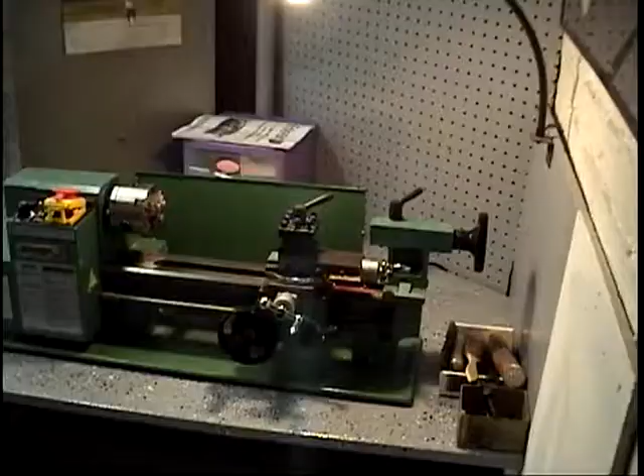When I finally got around to getting the lathe out of the box and setting it up, I knew I couldn't work in that little area we had. So I organized this whole area. This took a couple of days, but now that it's done, Karen has helped me organize all my drills, buffing pads, and all these little peripheral things. We painted the tabletops too, and I've shown some of that on previous videos.

But the bottom line is, now I can get some serious work done. We're coming up on that part of the year, in fact if you look out at the weather today, it looks like it's going to snow.

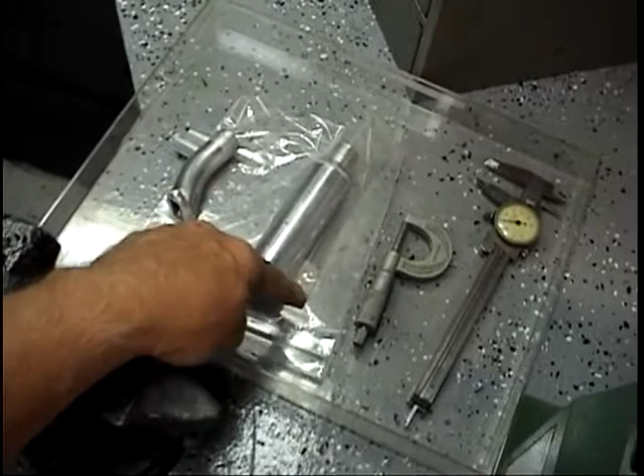I think one of the things we were able to make up, little test parts, these are going to be more. We're going to try to get them professionally welded now. We learned a lot about exhaust systems, and we know on Sergi Belco's, if I just put a bigger exhaust stack on that, it'll be real nice. We learned a lot, and every time we learn something, I try to pass it on, because that's part of what I enjoy about life.

I love being out at the field all covered with grease and oil, sweating and uncomfortable, but I love to, on that ride home, think I learned something.

Every time I needed a screw, a bolt, or a nut, it just made me crazy. I needed a crimp, couldn't find them, now we have them. I needed a wheel collar, couldn't find them, now we have a drawer. So what I'm suggesting is, maybe as we start the building season, this is something you want to consider. This organizer was about $15, and some of these other organizers I got years ago, I got all these new pliers too. What I want to do is start this year's plans off with the shop organized.

Now, over the years, what I've been very prone to do is this. I don't know if it's in the gene pool, but I know my mom and my sister are all saveaholics. We really saved everything. Part of that is because we were very poor, so we never threw away an old tire, an old wheel, an old bicycle rim. We saved everything, because you never knew if somebody was going to lose their job or whatever. So we saved all this junk.

But what happens, and it's this time of year right now, I go through the house, through the garage. We have a garage weekend coming up in the next couple of weeks. Karen and I save stuff all year, and then we have what we call our fall throwout day, which usually results in about 15 bags of garbage. Then, though these things don't necessarily happen at the same time, I like to organize.

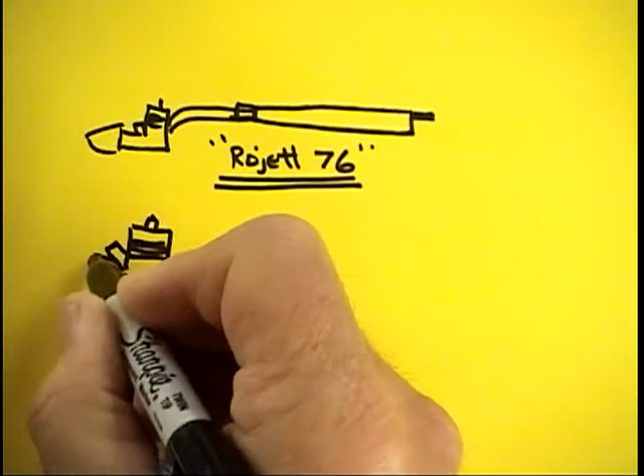The 90 will be even better, but there's going to be a difference. It's a subtle difference, and you don't think about it. A lot of people don't even understand how it works, and maybe I'm one of them, I don't know. But this is going to have some kind of a muffler.

Now what I'm going to constantly be working toward is a thing I call powertrain weight. We're basically going to be replacing a tuned pipe, which is about 2 ounces, a coupler and header, which are about another 2 ounces—so that's 4 ounces—a 12-ounce motor, and a 1-ounce spinner.

Now these are the component parts, and when I take the Spitfire apart—we're going to be doing a lot more testing even in bad weather—I want to know what this whole powertrain component part thing, the total all-up weight, is going to be.

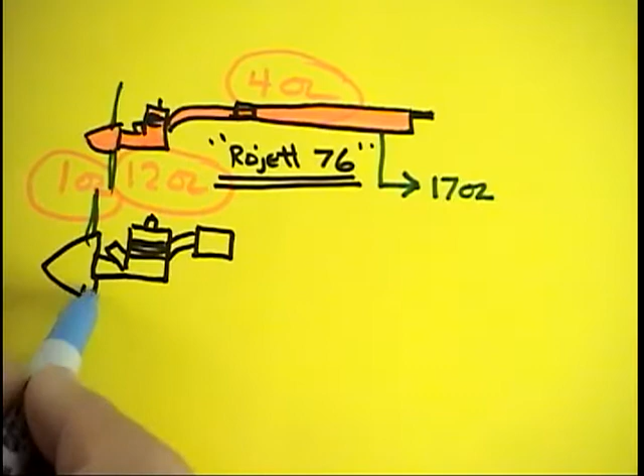Well, just rough numbers, our whole powertrain last year was about 17 ounces. Now it doesn't really include the prop, because we're using pretty much similar props on both of these. The Doran props are the lightest of the props.

We haven't done any 3-blade testing with this yet, because Doran hasn't given us any of the bigger diameter props, but we certainly will be the first ones, hopefully, to get them. Here's my point now—I'm starting with what started out to be a 21-ounce engine.

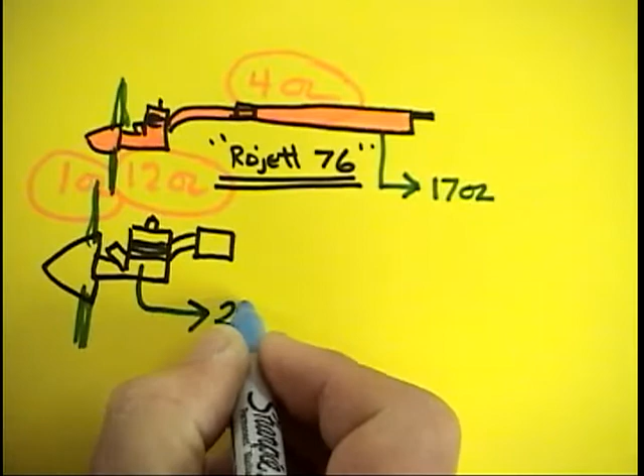A little under 21 ounces. Did not include the muffler—that's another ounce for the muffler, this little muffler that came with it. And the spinner now is about a half ounce.

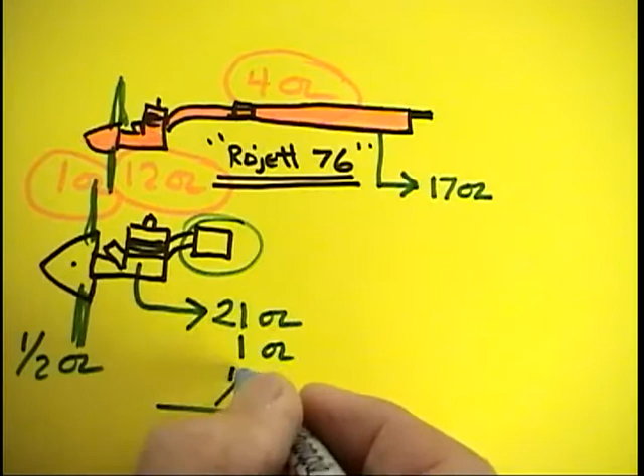Well, here's what I'm alluding to here: we've got a variance of just rough numbers now. I'll give away the half ounce, just to make this simple. We've got a 5-ounce difference in total all-up weight.

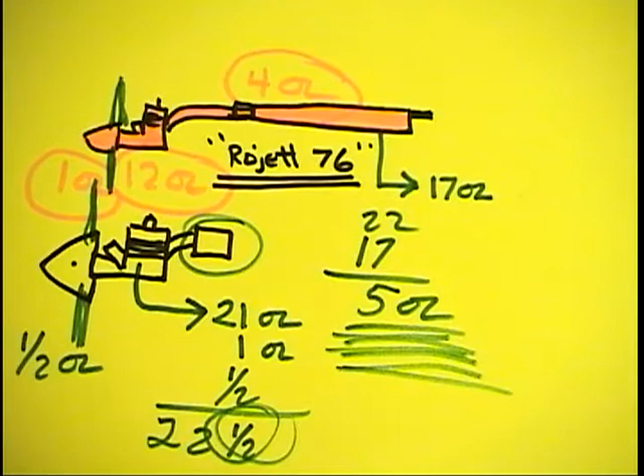Now, we've pecked away at this. This isn't 5 ounces anymore. We started out with a 5-ounce handicap, which I managed to reduce by making a lighter drive washer, and that pecked it down to about 4.5. I'll be rough about these things. Getting some material off the back of the motor, and the header was another half ounce altogether, so I'm down to 4 ounces.

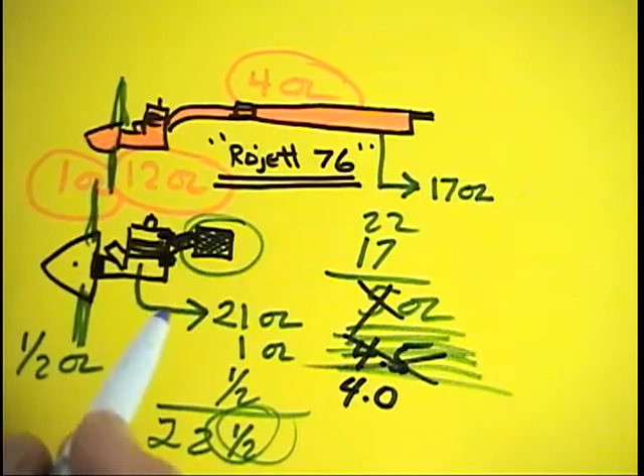Now, part of what I want to try to do, and start working on today, Bob Zambelli may be able to get Saturday off and work with me on this. We want to make up some real lightweight exhaust parts, because one of the gains we can make is that we don't have to carry around a 4-ounce exhaust system.

Between the header, the coupler, and the pipe, that's a 4-ounce Christmas tree ornament. I'm hoping we can get this down to 1.5. I have it down to 2 already, and I think there's another half ounce left to get out of there.

We're also going to get this case from Rich Oliver, and he's going to allow me to butcher up the case and see how much aluminum I can get off it. But keep in mind, as we start this, we're starting with a 4-ounce handicap.

Now Rich Oliver already sent me, I have it in the truck ready for our next test day, Hemi heads. I know in the past that on the squish band head, when you took out material there was a little bit of a weight gain. I know on some of the heads I did on Old Tigers I took down some of the diameter. I don't know how much we'll be able to take off this one. And I've taken off some of the finning off the head.

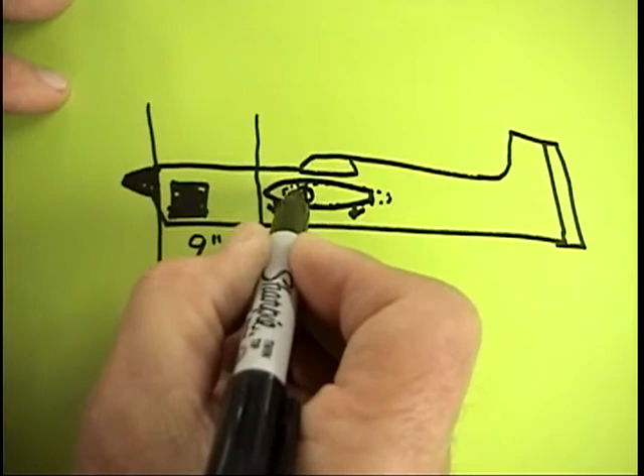We know that losing 1 inch off the nose, and you can figure the calculation, there's a scientific formula, if you move that weight further back to the CG, this is all good and well. But I know an 8 inch will be too short, because with the Typhoon, what happened is that motor there was no ability to get weight off of it.

That motor just went in at 21 ounces or whatever, 19.9 or whatever. So I'm not going to run that risk, because now we do have much lighter spinners. The spinners and the carbon fuel tank, these are the parts that make this happen - a light spinner, a light fuel tank, getting some weight off the nose.

Now the wing is going to be further forward. I don't want to change the view of the plane, I just want to have the wing further forward, which automatically is going to increase the tail moment 1 inch. So we'll have aerodynamic forces where the tail moment on this now will be 1 inch longer - it'll be 18 inches. I've built pattern masters - in fact, Jose's plane, this is a 10-inch nose and an 18 tail.

And I got this wrong, by the way - it should be measured hinge line to hinge line. But just to make it clear, look what happens when you do that.

Now when I draw the center of gravity line in, my 9-inch nose - let's pretend this is a seesaw, and I've taken the guy who's the heaviest on the seesaw and moved him closer to the fulcrum, taken the lighter of the two guys and moved him an inch away. So the aggregate gain is 2 ounces here.

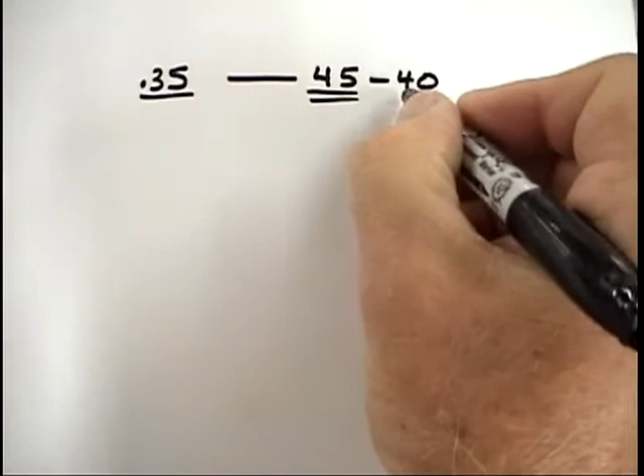Now, to relate that correctly, think about this for a minute - this is the part that you have to think about before this all makes sense. We all know an old Fox 35, just to use a good example. Fox 35 would be real happy pulling around a 45-ounce plane, but it was a lot happier if it was 40 ounces. It was really happy - you build a Nobler at 40 ounces with a Fox 35, probably a good combination.

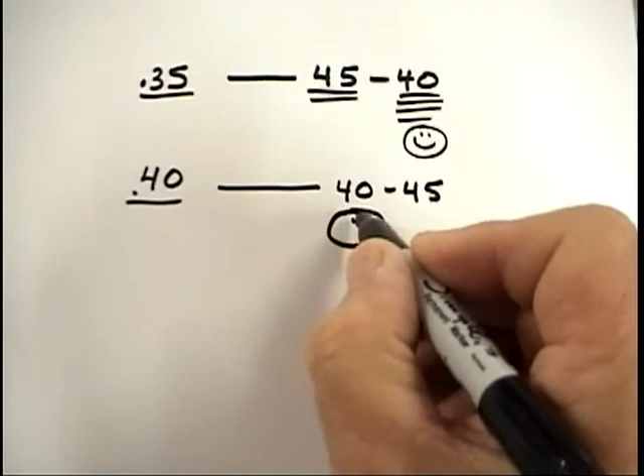We know, for instance, typical 40 planes - you can pick the one you like, unless you're building ultra light - these are going to be in the 40 to 45 ounce range, and they're better, of course, at 40, but even at 45 they're okay. Now, what happens if you build a 60 ship? Look at what really happens - almost every 60 ship that we've ever seen comes in between 60 and 65, except for maybe some very heavy ones or very large ones like a Pattern Master.

Okay, but here's what's happening with the 76 - the reason we had a nice gain was it wasn't any heavier. The plane didn't get bigger and heavier, but the motor got bigger.

Now, the analogy I use: if you have a Corvette - we're going to look to bring this plane in at 65 ounces with a 90 - if you have a Corvette and it's got the 283 engine and you take it out and put in a 427, well, there aren't many people that don't realize you can detune the engine, you can drive around in 4th gear, you can run a much lower state of tune that always equals reliability. It'll get friendlier to drive - it's always friendlier to drive a big engine.

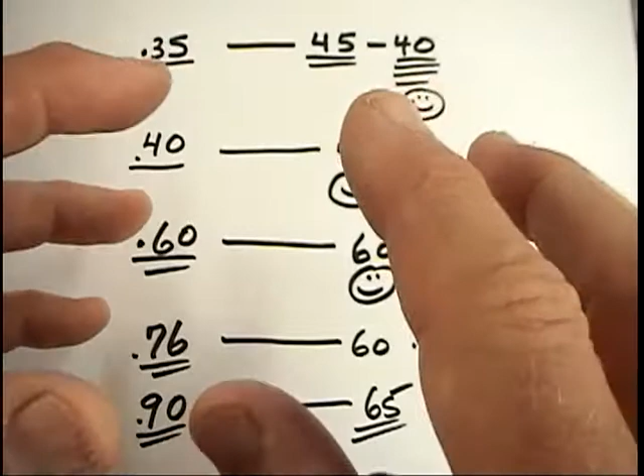So what we're looking to do is, again, the same plane that used to be pulled by a Tiger 60, in fact it's exactly what we're flying right now, is a plane where the cubic inches exceeded the weight by almost 50%. Now in this case, on a Fox 35, it was the opposite. The cubic inches and the weight were in an unfavorable 1-to-1. Somewhere around a 40 ship, it gets to be 1-to-1. But in these bigger ships, you get a bigger displacement to weight ratio, and that's where I think the gain will come from.

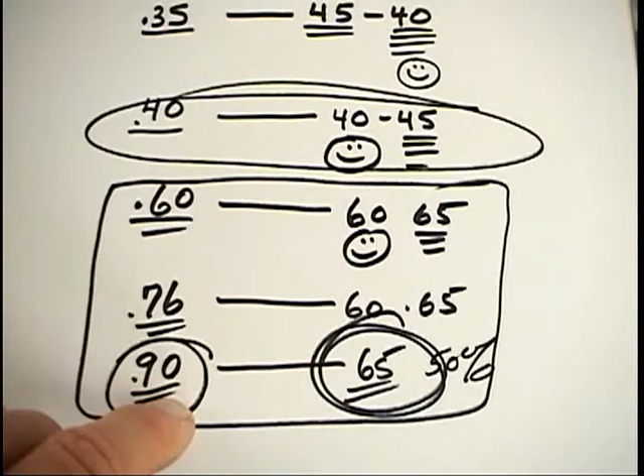It'll look like a normal plane, it won't get bigger, it won't get a lot heavier, and it won't get a lot different looking in the pattern, but it'll be detuned to the point, once we come up with more exhaust systems, more head choices, and more people start working with this engine, we can still have a lot of the good characteristics, like putting a 427 engine in a Corvette. It'll be a Corvette that's a lot easier to drive.

Now, one other side benefit. In the case of Rich's Stuka, there's only one detracting feature that if I was a semi-scale buff, looking to make it as scale as possible - there's one thing that really detracts from Rich's plane. It's the sound. Running the thing at a high RPM, the sound is nowhere near as scale as if you were running at 8400.

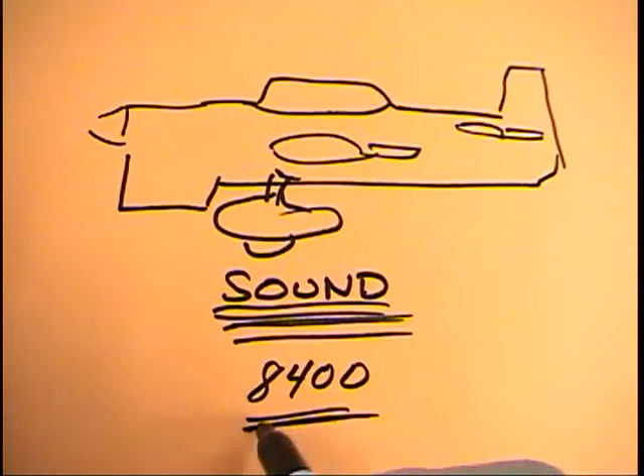So if it's going to be a semi-scale plane that Rich is building, there'll be an advantage in a lot of ways. He won't have to allow for the pipe under the fuselage. He can make this fuselage a lot more scale. The exhaust will come out where I think it's an optimum place, and Sergey Belko told me this - when it exhausts out here, it leaves a smoke trail. When it exhausts right under the high point of the wing, or just in front of it, the wing dissipates the smoke. This plane that we're flying has almost no oil on it at the end of the day.

It's a one paper towel wipe off. And the other thing is the smoke trail - go look at the videos, there's almost no smoke trail at all. It dissipates that smoke beautifully.

So these are two little things, and if you go back and think about exhaust systems, that's the next thing we're going to be developing - two things hopefully in the next week or so. We're going to be doing the Hemi heads and coming up with some exhaust system options.

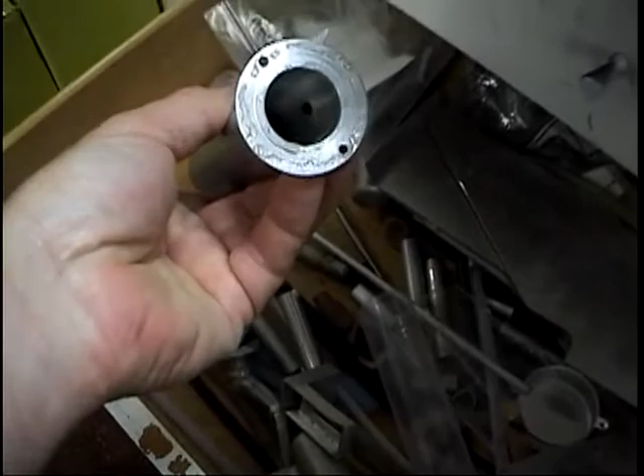Every once in a while I go into this drawer because I had a lot of experimental things I made years ago - side to rear exhaust, and these were complex machine shop jobs. Craig Gunder made a lot of these. We have a lot. This was one of the ones we actually used at the Nats, this design, except obviously it's heavy, it's thick wall tubing. In fact, we could make a muffler out of this, and just, now that we have a lathe, thin wall it down. Some of these are just complex.

I don't even remember who was making them, but a bunch of different little wall tubings. Now Warren Walker is due here within a week, and he's going to be bringing us some tubing and some stuff, some billets. I had done this one and even tried to super lighten it up, another side to rear. But here's the point - in the course of making these, I've made a few exhaust systems, and I might have made more than most people, maybe more than anybody. I don't know, that's up to you to decide. But we do know certain do's and don'ts about exhaust systems.

Now, no matter what the rules may be, these are always the rules, and there's not much you can do about it. A side exhaust engine will always have an advantage of getting rid of the exhaust heat no matter where you put it into the airstream, whether you make a tube muffler or a tongue. A side exhaust is really your best friend when you're looking to cool an engine. It's a tremendous difference than having a rear exhaust, especially when you don't have good airflow over the engine.

But what we learned, and we're going to just reverse this for a little bit - when we make a rear exhaust, number one, we have to allow, and you've seen I put those pieces of wood on the plane to funnel some more air. This is the hottest part of the engine. This is the rear exhaust.

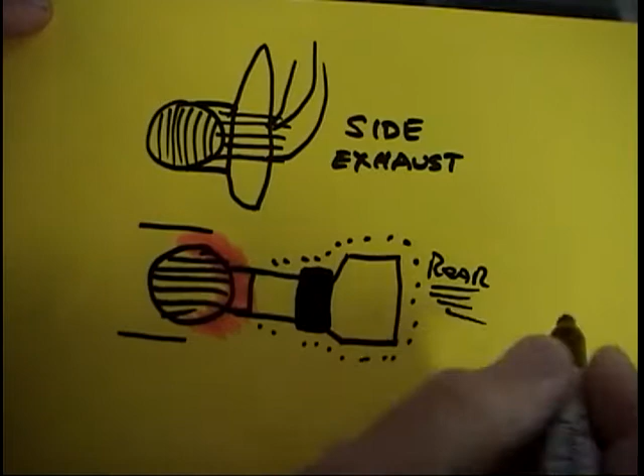Now, when we started making tuned pipes back in the late 80s, the pipes of the day, which were pretty crude to say the least, were way over 3 ounces. Many were 3.5, some were even 4 — some of the original ones I remember weighing were 4 ounces. Well, we have them down now to where they're a whole lot lighter. A lot of them are under 40 grams, a lot of them are in the 1.5 ounce range.

The modern ones — but I hope I'm going to be able to use that same technology to make an all-aluminum exhaust. Now, this might even be obsolete in a week for a simple reason.

Normally the resin we use to make the tuned pipes is rated for a constant temperature of 450 degrees once it's post-cured. That means, in theory, you should be able to leave it running all day long at 450 degrees without a problem. The issue is, right up here, if you've ever looked at any of your pipes, this front part really starts to get brown a lot quicker than in the back, because the temperature up here is very hot. It gets cooler and cooler as you get to the back of the pipe. A lot of people don't know that.

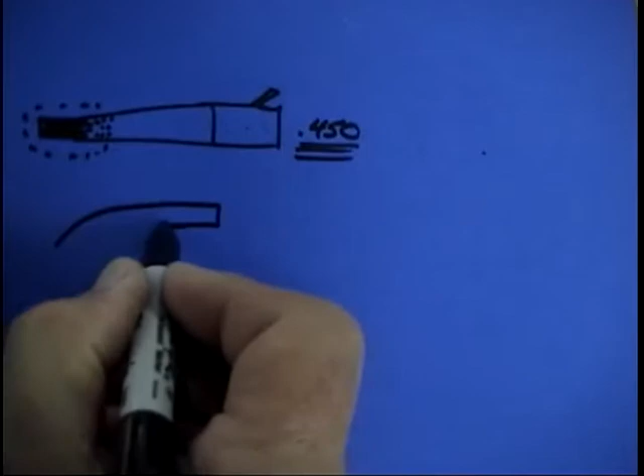Well, if you were to take a header — and I've seen people do this — they don't want to shorten a pipe, so they cut this much off the header, put the rubber coupler up here, and immediately they have problems with life expectancy.

So what we want to do — the objective of all this — number one, we could always just run a pipe, that's not out of the question either. But we might want to leave the option of running a pipe in the plane. Right now, in fact, we could even cut this plane of Jose's up; it's not like it's going to be the concours winner next year or anything. But this is getting better and better, and this is the part of what we do that I enjoy. I enjoy this a lot more than spending my life chasing trophies around the parking lot.

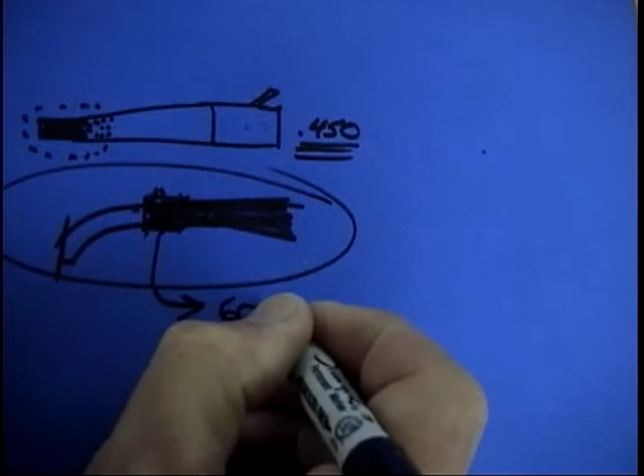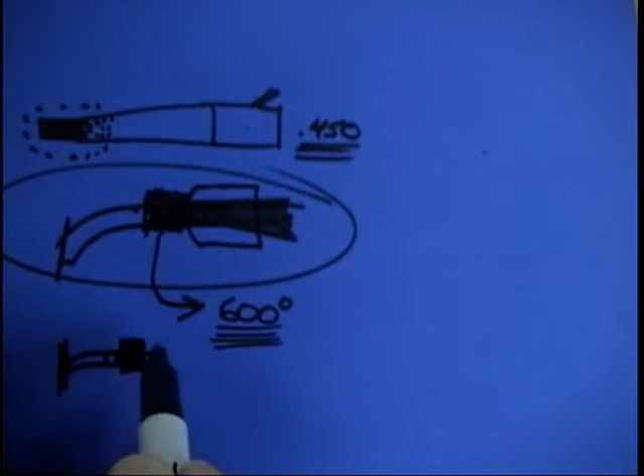This development — Dubjet has come across an even higher temperature resin, I believe it's a 600 degree resin. I'm hoping that somewhere, and we're going to get a test on this within a week, we're going to be able to make some of these parts, and then I have to do a test bench day. I have to get all these exhaust systems out, get them on a test bench, get the thermometer out, and find out how close to the engine I can get before these parts start to show any signs of deterioration. But in the meantime, I want to have the option of having my next couple of exhaust systems all aluminum.

But anyway, that's where we're going. There's a couple of things that come into this, and this again may be a little too complex — maybe you're not even enjoying it, I don't know, but I wanted to get some of this on tape. This to me is some of the things that'll help everybody have a better understanding of what we do. Even if you're not into this, just knowing how it works is interesting.

The idea of any exhaust system is that exhaust comes out of the motor, usually from that very hot part of the motor. There are several different ways you can quiet the sound. You can take a tremendous volume, like a soda bottle, and just run the exhaust into it. As the gas cools and expands, the sound waves dissipate.

Another trick is you can make the wall of what you're doing able to absorb sound. As an example, copper and aluminum don't absorb sound well, but carbon fiber does. That's why when you put a tuned pipe on a plane, even if it's a loud tuned pipe, it's still quieter than most. The other way you can make an exhaust quiet, and this gets real tricky, is you bend sound.

You can take this pipe - we made one of these for the Typhoon. You can put a bend in a pipe, and supposedly, George Aldrich told me this, every time sound bends around a corner you lose 90% of it, or it goes down by some amount. I don't remember the exact formula.

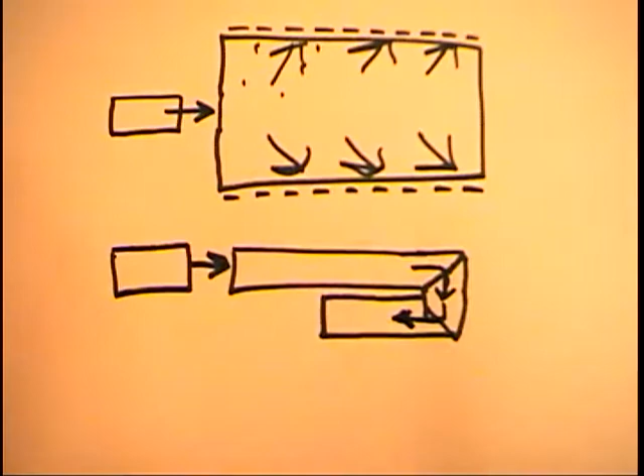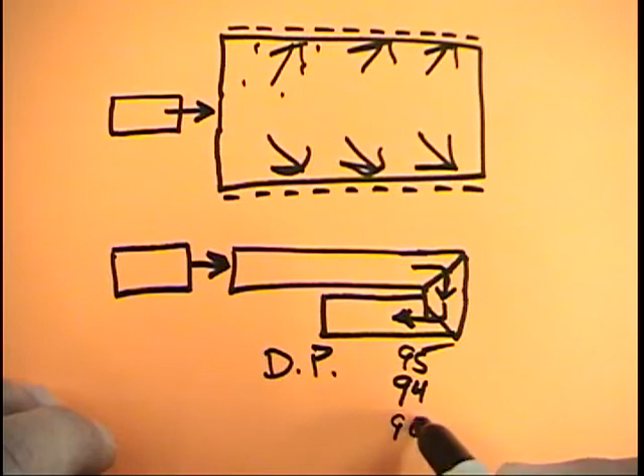It doesn't matter, because it isn't the decibel meter sound that we're after. In other words, if you dB out a pipe and it's 95, another guy can have a pipe that's 94, another guy can have one that's 90, and you can have one that's 84. And they can all have one thing in common: they can all be an annoying sound.

Now, as you go up in frequency, there are frequencies that are annoying. That very high frequency - if you listen to that for half an hour, you'll have a headache.

So the point I'm making here is we are going to try to make a muffler that might have a dB rating of 90, but it's not annoying because it's a low frequency. Think of beating a drum instead of playing a violin. A lot of times you can still have a relatively high dB meter rating, but it's not an annoying sound.

You don't have the annoying sound, like a weed whacker. When you have a weed whacker sound where it's buzzy, a high RPM sound, it's an annoying sound. You can have a lower frequency sound that may be just as loud, but it's not annoying at all. And that's what we're going to try to do.

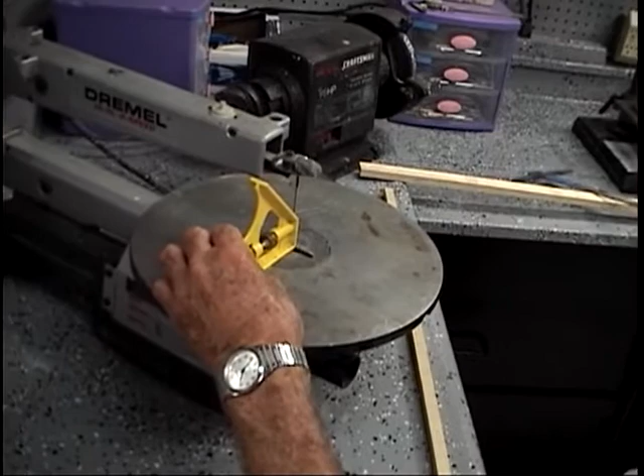Oh, then it's not. Do it with a triangle. You got a triangle? That goes out of square from us doing construction work on it. I buy a Dremel tool and use it like guys use a Skilsaw.

That looks like it's just off a smidgen. Okay, let me see. Just use the 90 degree block, do it one way.

That's a real important step, is getting that right at 90 degrees. A little sanding block. As long as you see a nice fresh sanding edge around the whole thing, otherwise those templates don't sit up there nice and straight.

See, because we're going to use that block when you put the dihedral angles in. In other words, you can't cut one side for a dihedral. You have to cut both sides toward a 90, or else the joint where it matches doesn't come out right.

I think we got it. Okay, let's check, you have a square? There's an easy way to do it. Take an ink marker and just put dots around the edge. When you sand the ink marker off, you're done. Just dots, and when all the dots are gone, you know you got a square edge.

Because if he doesn't do this, then when Johnny puts the template on there, if it's off to an angle, it's not going to be straight.

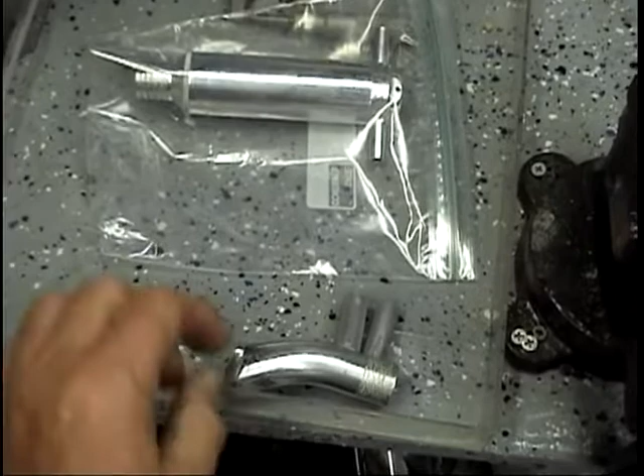And Bob Zambelli's going to work on this muffler and make a bigger stinger for us. I'll see if I can get Scott to make two of these, and we could use one for Rich's Stuka too. Then it's only going to be a matter of time before we'll have three, four, or five good exhaust systems, and then we can do that bench test.

Okay, and you just go one at a time, because all it's got to be is tacked in, Rich. You actually could do this without the wing there, but then, see why you want the blocks to be nice and straight? Yeah, so you line up perfect.

Exactly. Now when he cuts, he's going to core this. This is going to be the... See, we couldn't figure out the first time, with these things so thin, and you put the pins in here, there's nothing to hold it to. This way it worked out perfect.

Now the nice thing about the way this works out is when you're done with it, and that wing is glassed and it's in the sun, you don't get all that rippling and bubbling and seams showing.

And this one, Rich, when it comes time to do the finish, every time you sand the silver, don't skimp on that. Don't give it one of those 'this is good enough' sanding jobs.

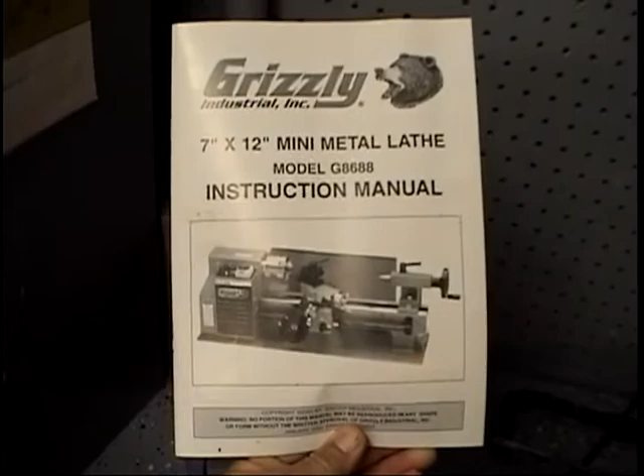But I'm going to video the demo for anybody that may have just bought a lathe like this. By the way, I got this for Christmas last year. It's about $500, Dave Midgley, it's a Grizzly. And here's the funny thing, it comes with this instruction manual which tells you absolutely nothing, not a single thing. It'd be nice if Bob can give me some do's and don'ts and some tips.

We need some cut-off parts. I was making end caps for mufflers for Scott Dinger. Again, there's nothing like having somebody willing to spend some time, someone with a high skill level who can pass it on to me. I can put it on video and pass it on to you, and you could pass it on to someone else, maybe you're wanting a lathe for Christmas. I don't know, you never can tell.

If we had the lathe while we were making a B25, we could have made the little nuts that go on the crankshaft, washers, spacers, extension units. What we really want to use it for now is doing Hemi heads, and just thinking of a hundred other little things. We're going to have a spare 90 crankcase here soon and try to lighten some of it up, making up some mufflers and modifications. Bob's going to try to modify that Sergi Belco muffler with a bigger stinger. A lot of things you can do if you have a lathe. Plus, in my case, I just like learning this stuff.

I said it was funny, I thought it'd been 5 years since I used a lathe, but it was 1984, so 25 years or something. Anyway, good news is this has held up well. We're real happy that when you're doing some work, that Rust-Oleum finish is beautiful. Now that we'll have it on our vacuum bench, it'll just make this area easier to keep clean and neat. I'll use up whatever spare paint I have left over on things like painting the ducts to the furnace, or the door, something that doesn't really matter.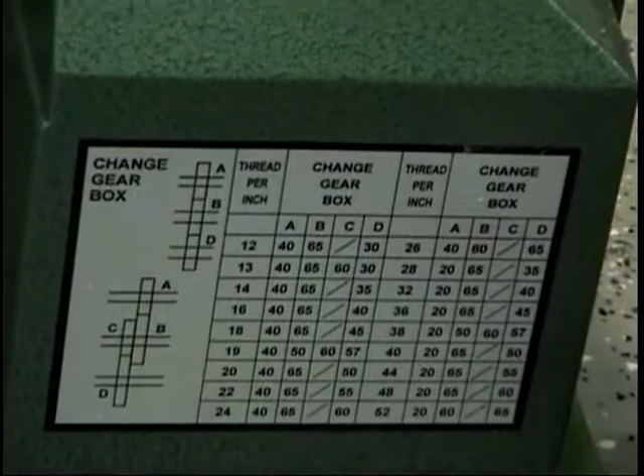What do you do for threads? No, you only go up to 24. Yeah, you won't be able to do that, forget it. But I know the front is camera threads, this part is camera threads.

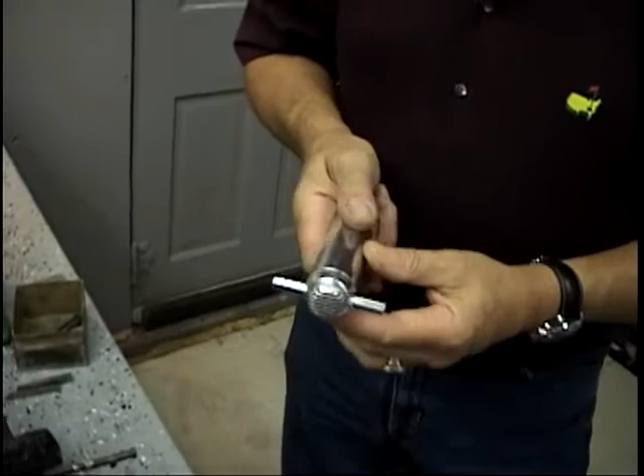Now, do you really want it like this, or would you rather have them? The idea is that it spreads the smoke out in two directions, and this comes out right over the front of the wing. This is kind of his little invention. When I ran this, oh yeah, because it's got to go, it sits in the plane up on an angle. I didn't know that, I thought it sat below the wing like this. No, and it's one of the things I want to test, just to see if it works.

All of these exhausts that I made wound up with 2 of these stingers. These are 425 ID. You can see, this is for a 60. But if you put this on the 90, it pulls it, crunches it back. Oh man, it's like putting a potato in the exhaust.

Now, the one I did for you, the one I just reworked and sent you, is that good enough for the 90, or does that hold the 90? The jury's out on that yet, we don't have close enough time. But I know with 2 of these it's perfect, it won't be any issue. And if it isn't, you can always plug one off.

I won't use this, I make my own. The nipples that you see on those, I machine those from a block and cut the threads on them, then you don't even need that tool. Well, lay this in a thing here, then you don't even need it.

I brought this stuff, there's more in the box. I know, Bobby brought some stuff too. We're gonna have Brian join us for a little lesson in refreshment.

This I use, see this is the kind of stuff I could use, like chunks of tubing. This I use to make my prop washers from. Whenever I make a prop washer, I always make it the diameter of the width of the prop.

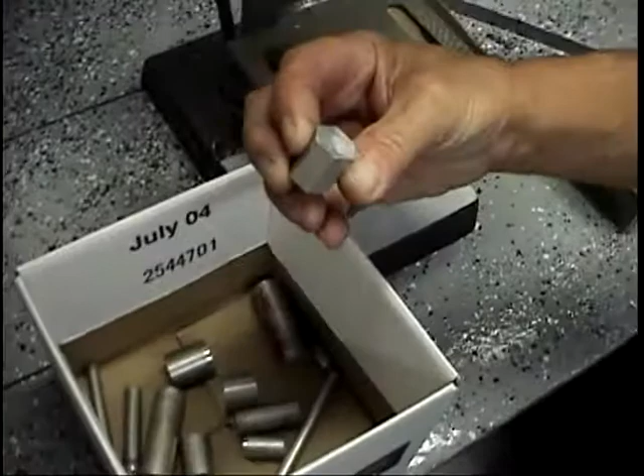I brought you some hex stock to play with. Yeah, the ones I made, this was just some scrap I had, but you can just tinker around with it.

Our buddy Warren Walker is now in mid-country. His RV broke down, but he got to Albuquerque or something and it broke down. Did you buy a new one on the spot? No, he's on his way, calling every day. He'll be here next Sunday. If you want to fly up, I'll pick you up at Lincoln Park. Sunday, yeah, I'm flying in the morning, but I'll fly up in the afternoon if the weather's good. We're flying kids in the morning. How much is the landing fee at Teterboro now? 25? Forget Teterboro anyway, it's probably out of control.

Yeah, that's the indexing, so you can put 4 different tools in. Sometimes they put a groove in it for the cutting tool itself. You're doing the right thing using a hacksaw, but it is a butcher job. Then you got to put it back in and dress it off. Do you have a center for this? It's a nuisance.

Here's what I have, and you can figure it out. Oh good, I got accessories. You got a steady rest? Is this what I needed you to do? And I got all the gearing, but I'm not interested in cutting threads right now. Okay yeah, we'll get to that. Save that for a Christmas party.

Is this a steady rest, or something? Yeah, this is a steady rest if you're turning a long, skinny piece, or a piece of tubing. You put that in and you just bring these in till they're just touching it. Gotcha, it keeps it from bowing. Okay, gotcha. I basically have a slightly larger version of this lathe.

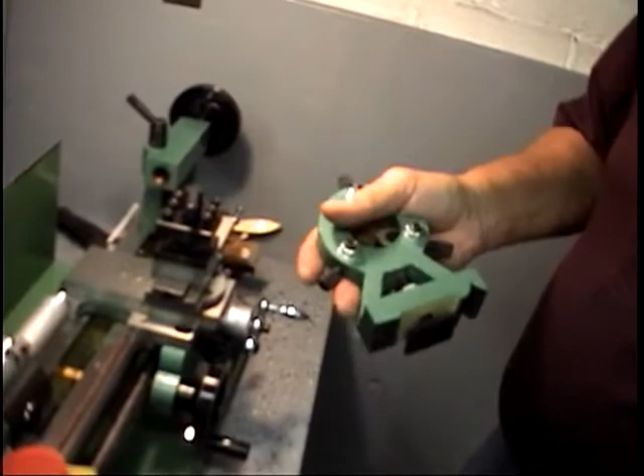When I started this up, this was about as idiot-proof as you could make it. This indicator's table, we got to figure out, they always translate these things. You can go up to 52 threads per inch. We'll have to measure what that one is. But what I'll do is I'll just make a whole new rear end for that thing, that will save the old one. And if I can't cut the threads here, I can cut them at work.

See, now a lot of these things, this is a faceplate. You take this off, and this goes on. And you can put like an engine case or something in there. Yeah, and they give you... you have to, if they don't give them to you.

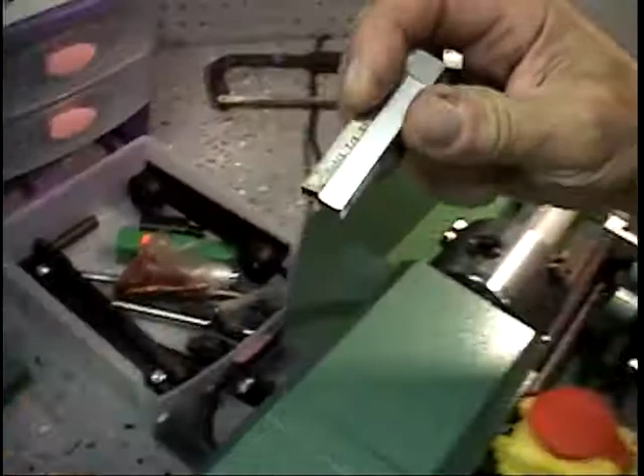Oh, here's some more tools, I didn't even see these. Is one of these one of the cutting tools? No, they're not cutting tools, they're not cut-offs. But see, these are carbides too. Now this is not—that's tool steel, and this is carbide. That's a piece of carbide, and what you do is you just custom grind it to whatever angle you want, but you got to use a diamond wheel.

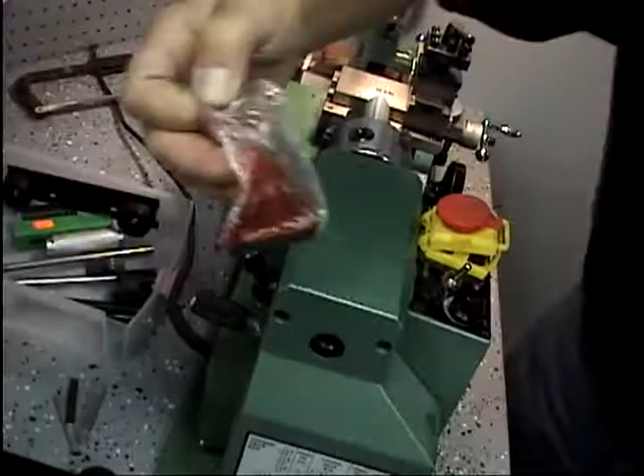Now here's your center, see what you'll do with this. I got to get you some center drills too. You want a pair of gloves so you don't get greased up? Like grease. Oh okay, all right.

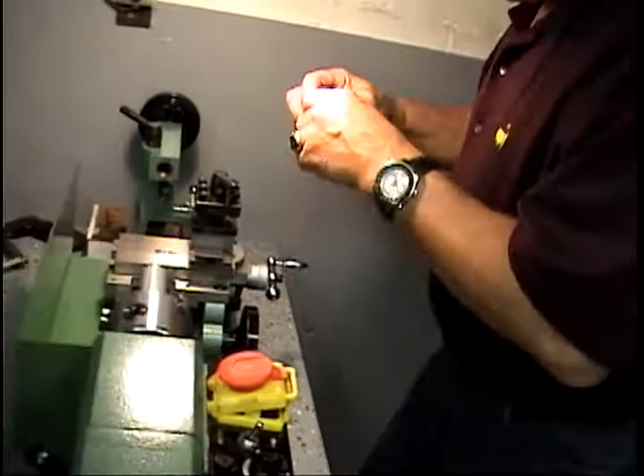So see, this is the... Midgley was going to do this, but of course he's busy with his boat. He's being introduced to the world of old boats. Oh really? Yeah, he bought an old boat, supposedly. I don't know if he's just kidding with me. An old boat is a hole in the water where you throw money. Well, I have no idea if he's kidding me or not.

Maybe he's just kidding. Can you hand me one of those papers? What you'll do, if let's say you want to turn this whole piece down, you'll take—you know, they don't give you a... there's a chuck.

You got a chuck. Yeah, let's put the chuck in, because then you can put a spot in here. Yeah, and then run your centering tool in it. See, there's stuff here, up on top.

I got the thing from Midgley to make washers now too, so if you ever want to make some special, like aluminum washers.

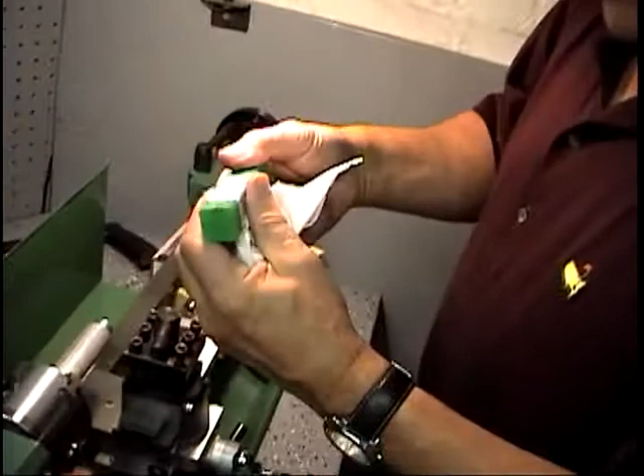Is this the chuck key here? No, that's the arbor. See, the chuck goes onto that. Okay, and it's a tang.

He was explaining to me on the phone, grind this, do this, bolt this. I said, you know, just come down. What's the big deal? Yeah, that may still be sticky. I'm not touching it. Let's pull it, move it.

I purposely didn't make it a permanent place, so we could be walking. I didn't even know if I was going to want to use it here. But make it comfortable for you, of course. I thought maybe I'd put it on a dedicated table somewhere, something nice and rugged. I would do that.

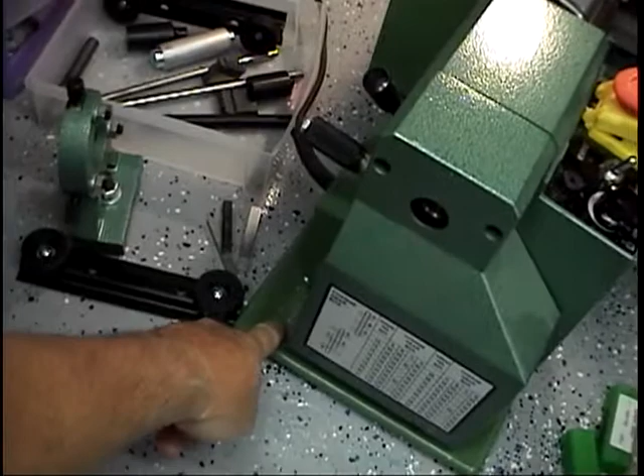Do you have yours bolted down? Yeah. Some heavy... what did you do? Just put screws in the corner, drilled it. Oh, if it doesn't have holes... yours is... I would leave it just set then. What I need is a large screwdriver. We got a large screw, we have everything probably but the one you need. That's big enough, that's fine.

Love old tools. I love tools that look like they're older than me. You would like my grandfather's barn. Oh man, he had tools, wooden handled screwdrivers all split. When Karen goes antiquing, I look at some of these old saws and think some man probably used that same saw every day for 30 years to cut.

Yeah, and the planes, those old wood planes, aren't they something? And they had to know how to sharpen them. They didn't go to Home Depot. No, they didn't.

We'll get this on here that way. All right, so let's see what you brought. I just brought the old carbon tank, the thing I'm building. Let's see, put them out on the floor.

How'd the contest go, by the way? I missed it. They had 22 experts, yeah, it went well. This is the Hawker. Oh, trike gear, yes, Hawker Hunter. Anyway, this is what I'm dealing with.

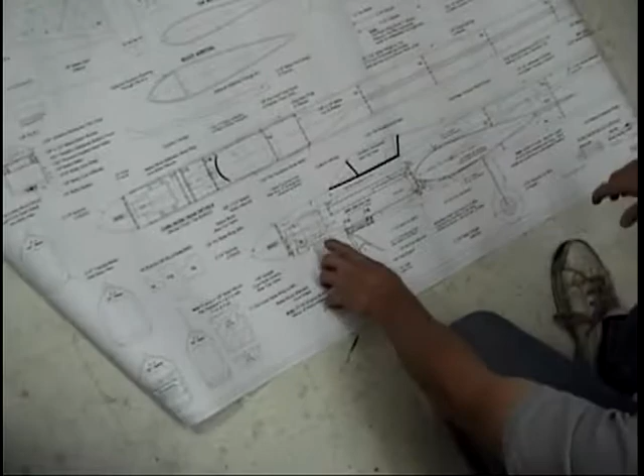I want to do the rear exhaust on it, to incorporate the gear. Now, I think this exhaust on that engine we're talking about comes even lower. You did a hell of a job with those plans. I think you should put a 90 in it and quit screwing around.

Did you do that by hand? What was that, did you draw those by hand? No, this is a kit, this plan is a kit, RSM kit. I just bought it. Oh, I thought you drew the plans. It's based on a Shark 45, but Bob Whiteley made it look like a jet, like the jet from James Bond.

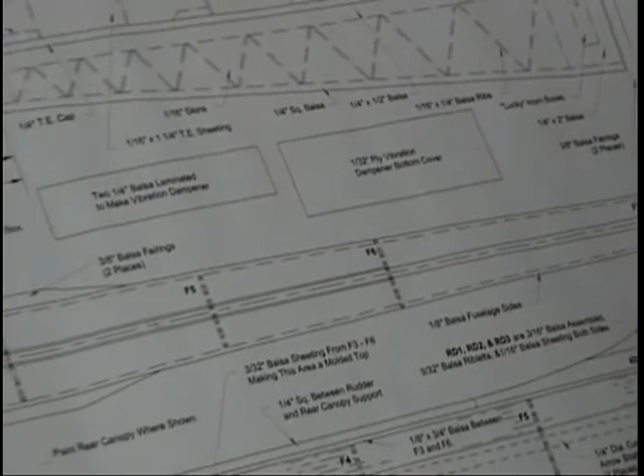Hawker Hunter, which is British, you know. Oh, I'm familiar with the Hunter, yeah. Yeah, he had a cool paint job on it too, all different shades of green. That Shark 45 is a good flying airplane. Yeah, this is a cool looking plane, bro.

So like I said, I just want to come with a 76 rear exhaust, maybe dump it over here, one way or another. We'll see what works better. I just this morning sent your exhaust out to Scott Dinger to have it welded. I made a 76 one up, if it fits, so you'd have one to test fit, and you wouldn't have to borrow the one out of the plane we're using.

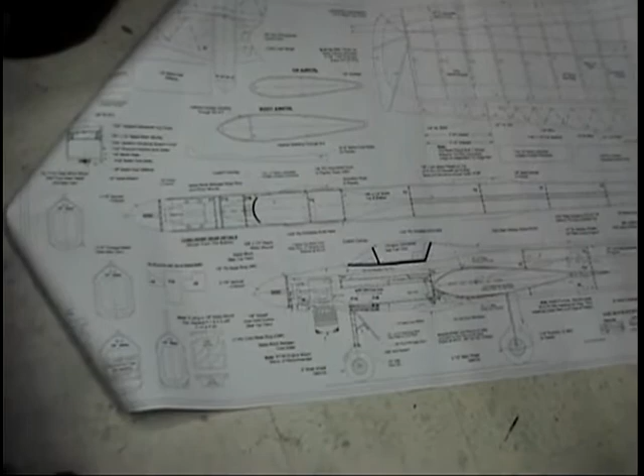Looks like it, sweeps from the side, doesn't it? Look at that, yeah, it's a jet. You could make that nose gear up cool too. This is classic legal, so I can fly this in both, this is going to do me instead of having two planes. Who flies one designed like this? Where did I get it from?

Oh, designed by White. Bob Whiteley. Usually these unscrew, they come off somehow. Make yourself a piece of brass or copper and turn it.

So you want a soft-faced hammer. You don't want to hit it and mush it out, mushroom it out. Always make sure anything on a lathe, if you're tapping with a hammer, make sure the hammer's softer than what you're hitting. That way you won't ding the ways or anything.

This, you'll never have to take apart. This will go in, but you have to bring that thing out about a quarter inch, otherwise this tang won't clear. In fact, it may not clear. Now, like when you're making a Venturi, you can put the drill in there, chuck up the Venturi and just run it.

Is that threading into there? No, it's supposed to go in, but some of these don't have clearance for the tang. This one doesn't, so that tang's got to come off. Which is no big thing, but you can't use this drill until you cut that off.

Grind it off? Yeah, I'll grind it off after lunch. I've got my wizard, if you're gonna hook it up through the whiz wheels.

That's a trick to do. What are you talking about? It's the wizard, you know, the abrasive cutter. Oh, okay, hook up your air compressor. I got it in the car. They're great, aren't they?

Yeah, we could run it. I got the compressor, turn wrenches for a living, we use them all the time. So, okay, you know that.

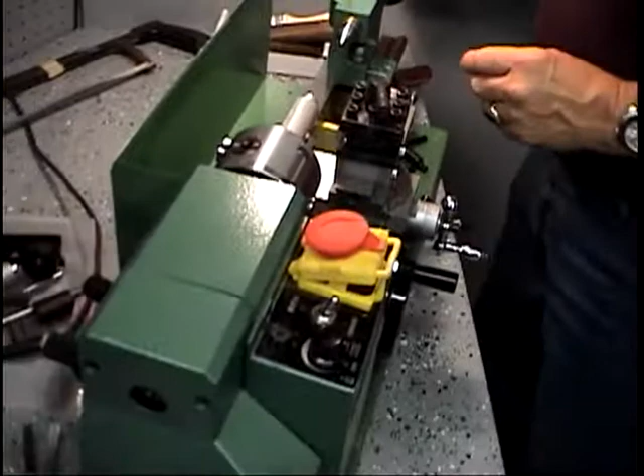I'm going to get you more stock. I'm also going to get you a center. There's a special drill called a center drill, and you never ever start your cut with a regular drill.

There's your close-up view of it. See how it's got a head that starts the hole, and then it just bevels it so you get a little lead in. Then you can go in with the next size larger.

I remember that from Joe K, always starting a hole that way, just center, and then you know it's on center. So you'll chuck your center drill in your Jacobs like so, and then you'll come right into the end here.

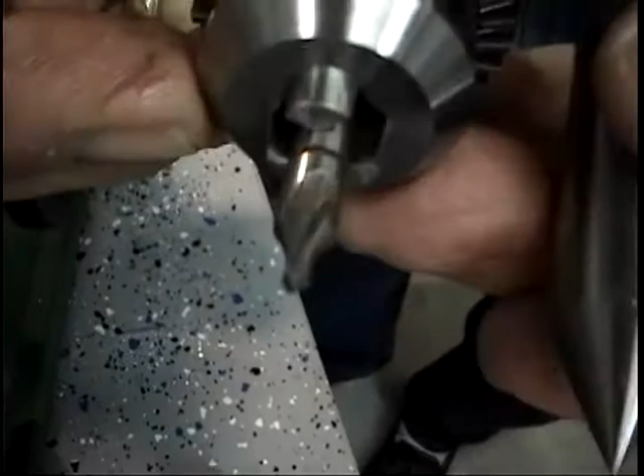And just put a little dot. Now, if you want to use the dead center, take your center drill in until it's almost out to the full diameter. See, you've got a taper there. That'll match this, and just put a little... the other thing you want to do...

Put a drop of oil on it. Get yourself a film can and just glue it on here, put a little brush in it, and put some grease in it. Or, better, chicken grease, I've heard. Or if you're going to cut metal, believe it or not, Crisco works real well.

The guy that used to work for us, he'd come in with a can of chicken grease for doing this. Fat is fat, whatever the reason. It smells good. No, it's a good cutting oil. All right, Brian, go get us some chicken, there's some chickens out in the barn.

And it's in, it's not going anywhere. You can't get it out, but if you want to get it out, just back this off. Watch, it ultimately pushes it out, because there's a little part in the end. It just pushes it out.

So one tap with the soft hammer and it gets a taper in. Oh, this is a Morse taper too, number 2 taper. Usually they're marked MT2. So this is a number 2 Morse taper, and that just gives the angle. They're both the same, except this thing's got the tang.

Exactly. Brian will whiff that off before the day's over. See, the reason they have a tang is a lot of the older drill presses had a taper, and there was actually a slot to transmit it.

The tang went into a slot, and then on the side of it, there was a vertical slot in the housing, in the spindle. And you drove a wedge in, you had a steel wedge, you put the wedge in and tap with a hammer.

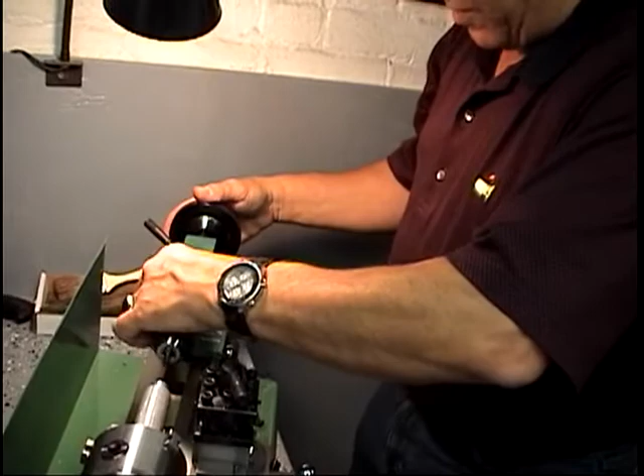That would pop this out. Gotcha, okay. But that's old. Yeah, see, this definitely not going to do it for you. Well, we can do that.

No, anytime you gotta fire up your AC air compressor. Yeah, but you really can't do it unless you can do it down here. You want to turn something larger than this, you've got to go to these - you see they're the opposite step.

And when you put them in, they'll come out one at a time, and they're usually numbered. That's 2, 1, this should be 3. So you have the first number, and you have to correlate the numbers because you can't just put them in anywhere. That's what they don't tell you in the instruction book.

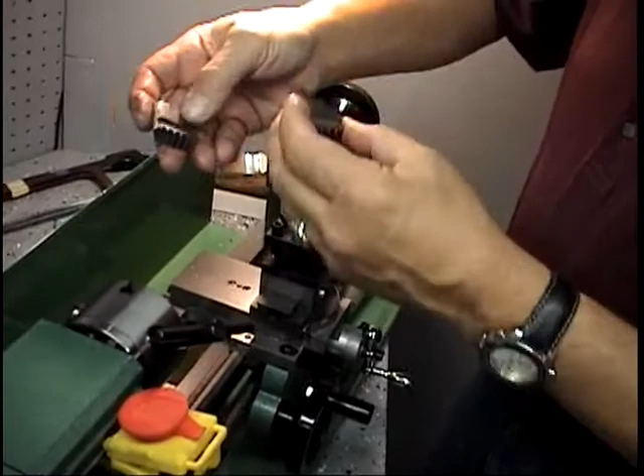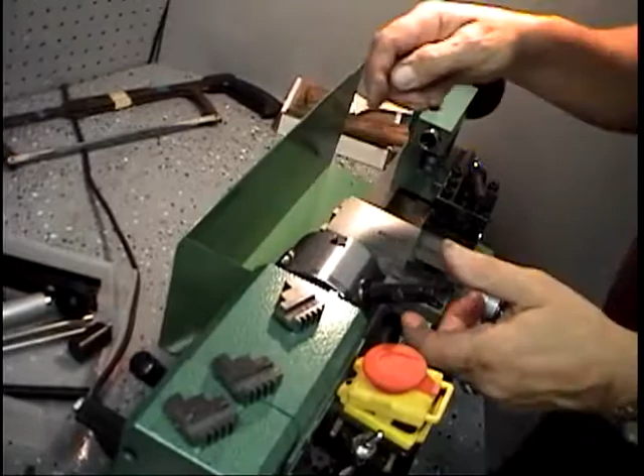Yeah, they don't tell you much in that little book. No, believe me, it's a comic book. So here's what you have - what do you do, like a clock, 1, 2, 3? Yeah, you start at number 1, and usually they're marked. Oh, there it is, okay, it's marked inside. Okay, and 1 goes with 1, 2 goes with 2.

Right, and turn it clockwise, I guess - I can't remember now. And what's the reason for that, the way the thread works? Yeah, because it's not a thread, it's actually a scroll, it's a metal scroll. Okay, gotcha. And it goes in like this, and it pulls them in. Okay, so 1, 2, and this is 3.

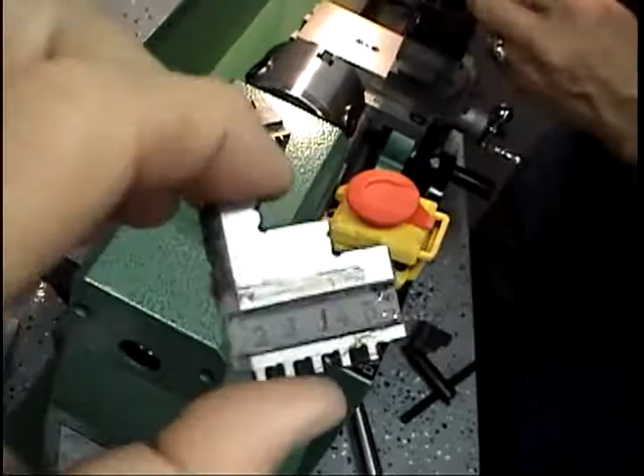Yeah, so if you have them in wrong, it's just not going to work, it's not going to center, it's going to bind up. But it's going to be fairly obvious, I would imagine, with the size of those teeth. Oh yeah, well, as soon as you put it together, you'll see if one of them's off.

Yeah, I would imagine that Aluma weld stuff - if you try to machine it. Now they're all, and this is how you can tell, you run them all in and you see they're all even. Yeah, exactly, that's the kind of information that isn't in the book. It is definitely not in the book.

No, I'm laughing - this company, for $500 they could give you this DVD for what it costs to print that book up, and they don't do it.

Grizzly, huh? I mean, even this paint, Brian, when you use this epoxy paint, you get a DVD with it showing you how to use it. Oh, they're giving you DVDs with everything. She bought the sewing machine, the Baby Lock - yep, you get a 2-hour DVD.

Okay, here's what I'm going to do. Do you have by any chance a little engraving bit for your Dremel? Sure. Let's do this, we'll make a little mark - see what I'm going to do, rather than you having to just guess where they go. Right, no, that's a great idea.

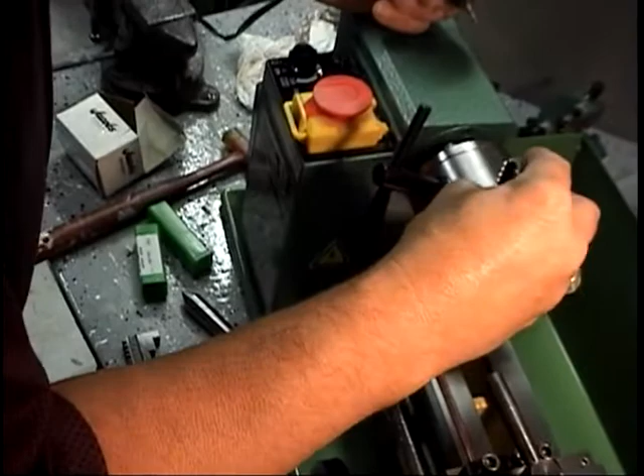Yeah, it'll really help to identify - put a ding on one of them right on that. Yeah, see this will go like so, and now put the 3 up there. Good idea.

Yeah, I can't believe that they sell you a $500 tool and they can't put a DVD in that shows you how to work it.

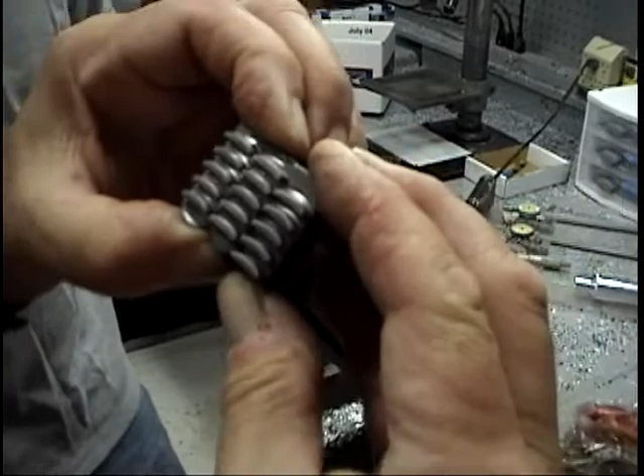Well, see if you look at this - yeah, they're just slightly off. Exactly, because they sit on a spiral, they're just off enough so you can't interchange them. Yeah, I can see they're like - yep. And that thing that's on the chuck key is a spiral, they call it a scroll actually, and it spirals in.

Right, but you can actually see it there - look, when you turn one, they all turn. Oh, I see, yeah, it's the scroll, it goes around. You tighten all 3 at the end. Now the next one that comes out will be number 2. And a 3-jaw chuck usually keeps it pretty well centered.

Exactly, but a 4-jaw you got to center it yourself. Yeah, but you can get it dead on. The ideal thing is collets, but they're expensive as hell. See, this is number 2, and that's the second one to come out. So, yeah, that's a good idea.

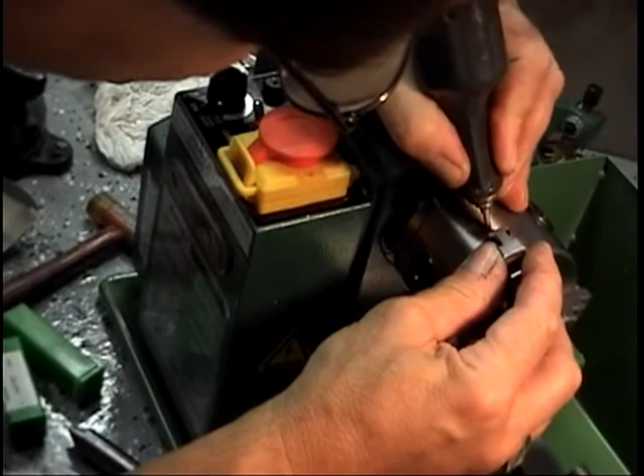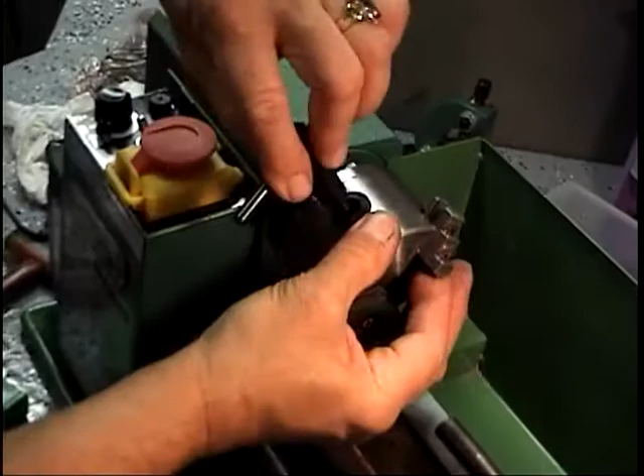And the last one, of course, is number 1. You turn it until you see the spiral in there go away, then all of a sudden there it is, it's gone. So now what you do is you find one, it goes in. As soon as the spiral goes away, one drops in. What spiral are we looking at here?

They'll let Brian get in there and look at it. You can see when you look in the top, watch the two, see the two go away. So it opens up, so you drop that in.

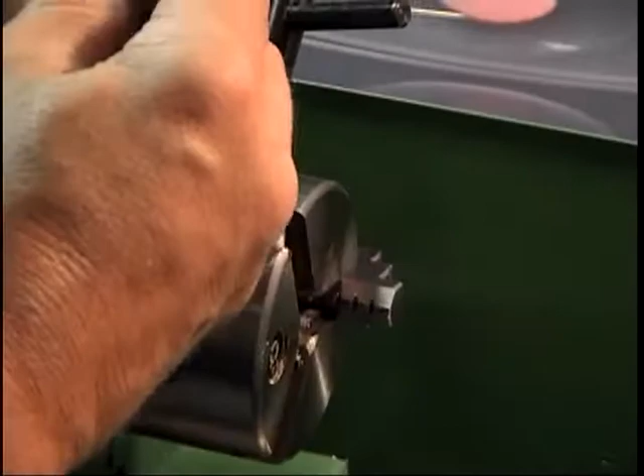Then you start turning this clockwise. Got to bring this over, it'll open to catch it all on the first one. Then you have to go to jaw number 2.

And you keep your fingers on them like that so you're making sure you're catching it. Anytime you're in doubt, just run them in all the way, and you'll see they'll all come flush at the same time. You notice they're flush to the outside.

Now what you have to do is go back until this one pulls out, basically. The other one is still locked in at that point. So all you do is look for the spiral to go away, and you drop in number 3, which is this one.

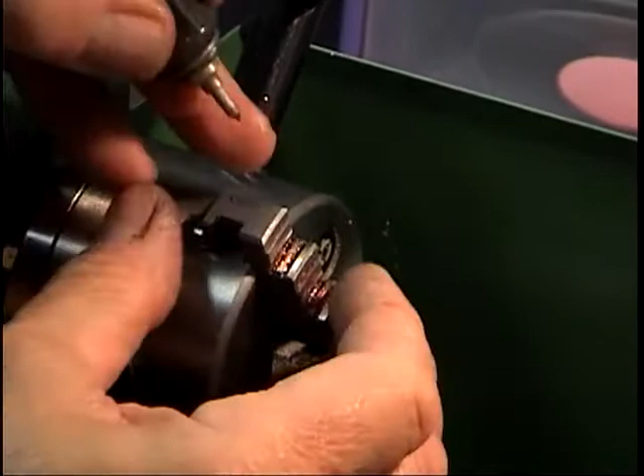And then you just hold it with 3 fingers and run it in. Once again, you always double check to make sure they're all even with the ends. Now we'll do the other teeth too.

See these teeth here, you have inner teeth and outer teeth. See the outer teeth, you'll see the outer teeth hold here.

So if you're turning something large. Also on these, if you're turning a piece of tubing, you can catch the tubing on the inside.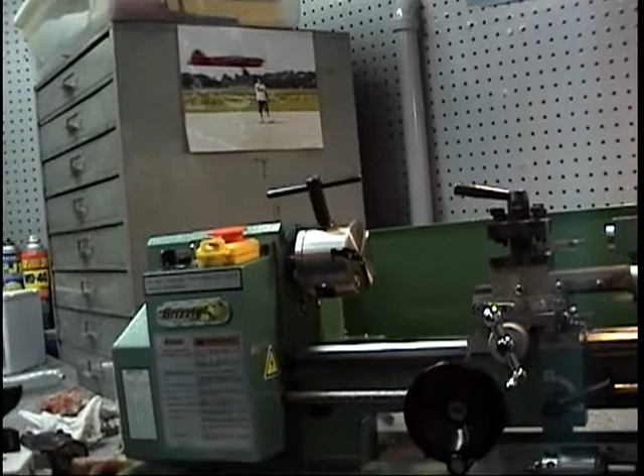So what we'll do is we'll take, well, take Brian's mandate to find us some 2-inch thin wall aluminum tube at an aluminum chair store. As soon as he goes, that's some heavy tubing for a chair, right? No, but if you found thick wall tubing, you can turn it down.

Here's what I suggest you do: put them like this, just put a rubber band around them. Keep them like that, you got 1, 2, 3. Now we're going to do the other ones, the same thing. I'll get a rubber band right now and do that.

Is it tolerant of all this stuff falling on it? What's that? All the metal shaving. Oh yeah, that's self-cleaning.

To find the scroll, you don't really have to even look in there, you can just turn it until it falls in. So what you do is you put your finger here and watch, you turn it like that. At some point in time, it jumps up.

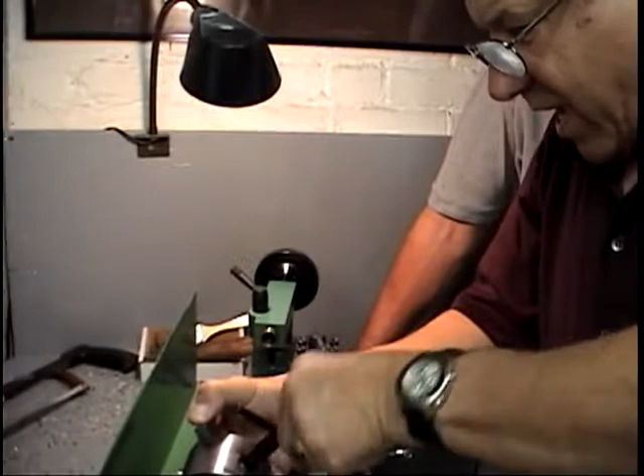It jumps in. Now you come in this way, and now we wait to go to the next drawer. So now we'll find number 2, which is the first number of the sequence here.

Yeah, that's a good idea to have it right on there where you can see it. You wonder why they don't do that. South Bend does, I got a South Bend at home. Everyone is stamped, but that's a professional thing, this is like a hobbyist thing. It's also made in the States. I don't think Dub Jet has one of these in his shop, you know what I mean?

Probably not, this is strictly a hobbyist lathe. No, I mean you wouldn't do big production things on this. You couldn't. And you see now they're all flush.

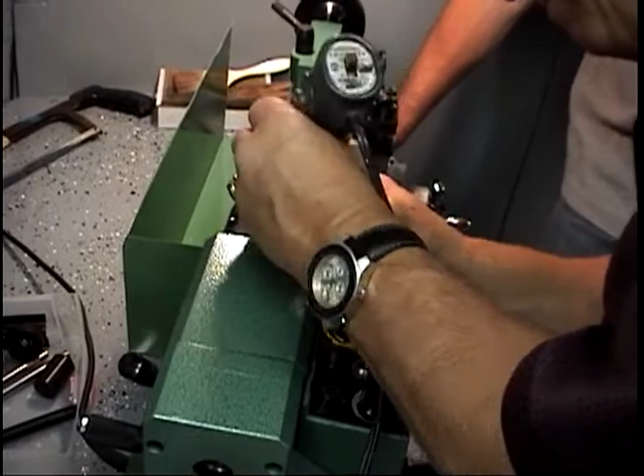So we have, we'll engrave 1. Numbers, right, beautiful. And as you can see, come around this way, and you can see how big a piece.

Okay, lunch is calling us.

You see how big a piece you can grab now. And when you bring them all the way in, that's about the smallest you can do. So you could probably do maybe an inch, 7/8 of an inch. You couldn't run anything dead in the center there because they all... Actually, you could. Yeah.

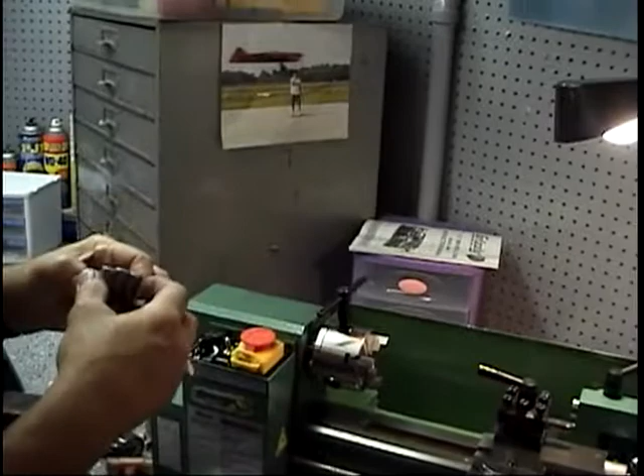You could run something in the center too, put a piece of anything in there. The nice thing is now you can change them quickly. You rubber band these together, and the ideal thing would be to get one of those pegboards with a little shelf. I'm going to get one of these organizers and mount it up on a pegboard, set the thing up, and I've got a nice bar strip magnet if you want.

Yeah, that's handy, aren't they? I got one sitting at home, I had two, I'm using one. If I remember, I'll give it to you. It's about two foot long. And you know the other thing with this lathe, once you start playing with it, you find things to do with it. You find little jobs, little things you can make.

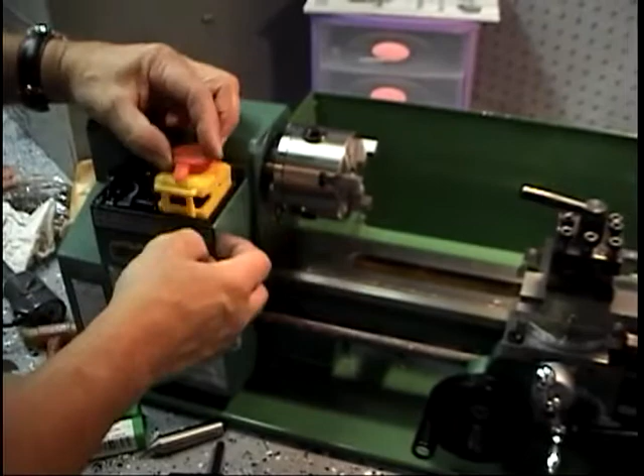Now, if you wanted to buy some accessories for this, are these universal type things? How about like the Harbor Freight stuff? I mean, that's all the cheap lathes, they're all made by the same company, they just have different names. There's a Harbor Freight opening up eventually. I bet, yeah, I've looked in it many times. They got all kinds of mini lathes. Grainger has everything too. So this should be the...

So there's your feed. I like this though, that's nice. And anytime you want to change speed, that's high speed. Go back here, shift, and if it doesn't shift, just wiggle this a bit. You see, that's a low speed, it drops the gearing down. Exactly, just a two-speed gearbox. Then if you want to reverse it...

Oh, okay, let's eat. Karen made a beautiful lunch for us, us professional machinists. Where's your chair, honey?

So you have this thing at zero, off, go forward. Now you have to stop, turn it off, go to center, and then go reverse. See, I never used it in reverse yet.

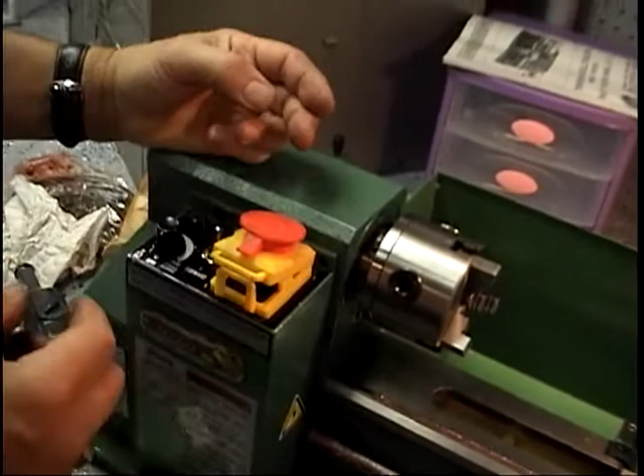Let's say you're working on the thing and you get your tie caught in or something like that, just hit that, that's your emergency shutoff. By then your neck's in it, and you're still yelling. You probably don't want to work with long sleeves, a flannel shirt, a tie, a bolo tie. Once you've hit it, no watches and rings, and it won't do anything until you come back. You hear a click, that resets the breaker. Okay, gotcha, go forward. That's a nice idea, really, you can't turn it on again by mistake, you have to reset.

No, it's a good safety thing, especially with hobbyists. I mean, one of us is going to cut a finger off before the week's out here. That's why we made sure, safety glasses for all of them. I've got them, and avoid anything, no rings and watches. Exactly, and especially no ties, no long sleeve shirts, guys working over with their badge, you know, you'd ruin a good badge that way.

Oh, look at this! Yeah, get the food off the table, baby. I'm working on it. Brian, you'll make a great maitre d', putting food on. What are we here for?

Oh, nice wheels, these are those new lightweight ones. They're for electric, John's starting to work on those. What I need is those wheels in six-inch diameter for my four-stroker, for a 90.

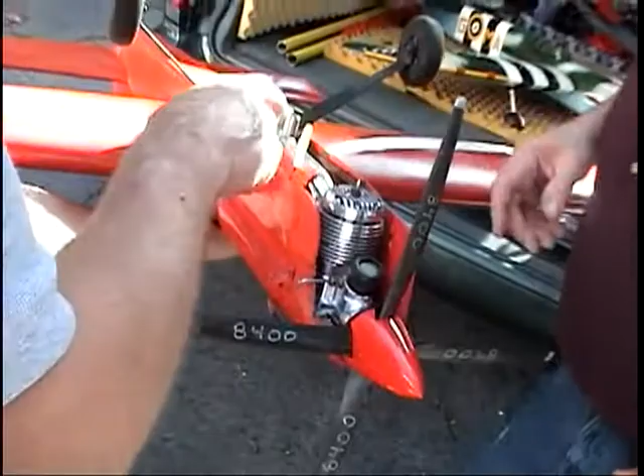Yeah, but you only had one stinger when I saw it, right? Yeah, I put the second one on. It's better with the two stingers than with one. That's a bar stock too, isn't it? All bar stock, yeah.

It bites too, Bobby - when it bites, it really hurts. Trust me. Nice fit though, huh? Oh, yeah.

Is it a heavy engine? That's our new spinner too - that's the carbon fiber spinner. Okay, yeah, that's one of the first ones.

Now, is this the one I made you the prop nuts for? Yep, they're already on there. Great - the rod, the prop nuts, all your stuff's on there now.

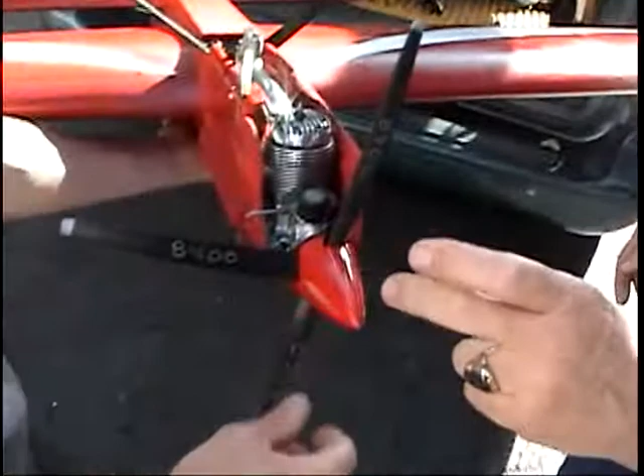Did I go 5/16 all the way through, or did I go 5/16 on one and quarter-20 on the other? Quarter-20 on the front. So you got the standard - that's right, it's 5/16 down here and quarter-20 out front. This is standard, Froome or whoever makes it.

No, Midgley has a guy - well, we got a couple of these from the original spinners that we had that we made the mold from. But he's making this piece and this piece. We're going to get - I don't know how many he contracted for - and then I'm going to fit the spinners in, put them in a lathe, and dress them all off real nice before I sell them. That's nice, that'll complement the Brodak spinner.

8,400 RPM. Wow, boy does that... Now, did you mold this prop, or is that one of the others? That's Doran's, Doran's 8,400 RPM. You think that back sweep makes a difference, or is it more for something else? I don't know, it works. I mean, I don't know how you could test it legitimately, like without a wind tunnel or something.

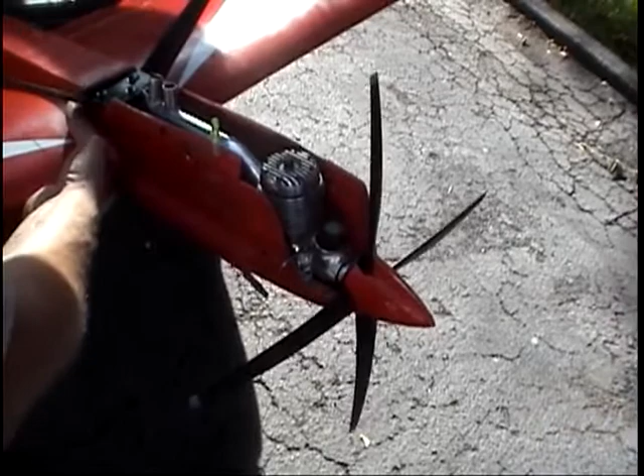What are you powering the Spitfire with? Is that the 76? The 76 is in the Spitfire, and Brian's going to have the 67 as soon as we... 67, what are you going to do, pull the 67 out of... what plane are you going to put it in? Oh, the plane I'm building, if you want... Oh okay, yeah, a 76, a 67 - the 67 is a long stroke engine made for no tune pipe.

Okay, how's this timed? Is this more for low RPM, long stroke? You don't need a tuned pipe then, really? Nah, this has probably got so much torque... believe me, this has nine head gaskets in it, and it still bites.

And this is the one you want to run straight synthetic? Yeah, it's never had a drop of castor oil in it at all. None of the RoJetts have any castor oil in them. And I've never had one fry or anything either.

See, I need bigger wheels, you can't clear a 15-inch prop. So you need some 4-blade, big Cub wheels, like the Piper Cub wheels. That's a 14, 4-blade. So if you went to a 2-blade, what would you have to use? Like a 15, 17, or something crazy. No, this is part of what makes this engine work so well — this prop is married up to that engine real well.

8,400 RPM, just so I didn't forget it. We were trying higher RPM and lower, and it likes right around 8,400, that's where it's real. You can see how nice and free that is, boy.

I remember all the ones I've seen of his — the piston will just about fall on its own. Broken in, yeah, they're nice.

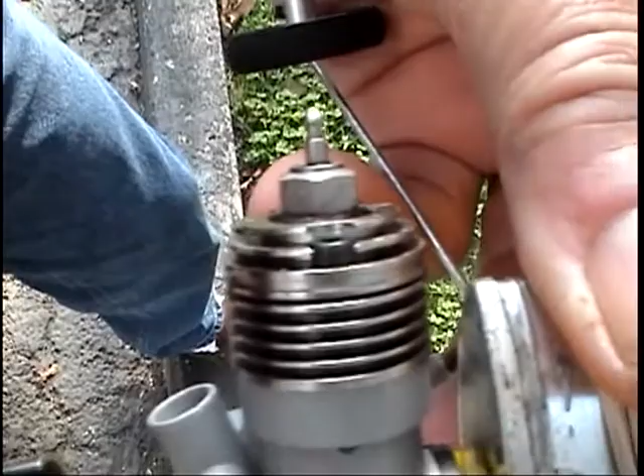It uses a normal glow plug mount, like normal. Boy, that's an asset. Yeah, and this is built by the same guys that are building the 40.

And this is similar — we're going to have 1-inch aluminum spinners. Now that spinner will come off. But it feels nice. The crank on this is about the size of a Fox 15.

But see, the old Flying Clown had a radial mount. But most of the new engines, as you can see, are beam mount. Isn't that cute? Look at that. Yeah, it's as cool as... And you could put a muffler, you could make a little... You could, yeah, but it's not that loud.

This is aluminum with a nickel flash on it, so it's actually a true ABC engine. It's got a silicon aluminum piston. This thing weighs as much as a TD-049, 1.7 ounces.

And these are the wheels John's going to use. I love these wheels, you can get them at the hobby shop now. Yeah, but they're using electrics — the biggest ones I've seen are 3-inch. I have 3-inch downstairs. I haven't seen them that big. What I need to find is somebody who makes 5-inch doughnuts, or 4-inch, just to do prop testing.

This took me a little over an hour to put it together, and I made the hinges out of MonoKote. The hinges he gives you with it are flex hinges — I really don't care for them, so I made MonoKote hinges instead. It works fine.

I haven't flown it yet. Well, just fire it up. My neighbor's not home, we'll go fly it in his backyard.

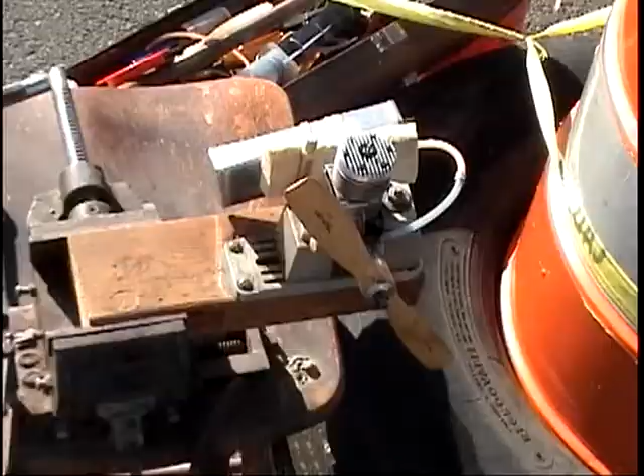Who's gonna fly that airplane? John, are you gonna fly that airplane first over there? Look, are you gonna fly that white thing? White? Yeah, before we finish.